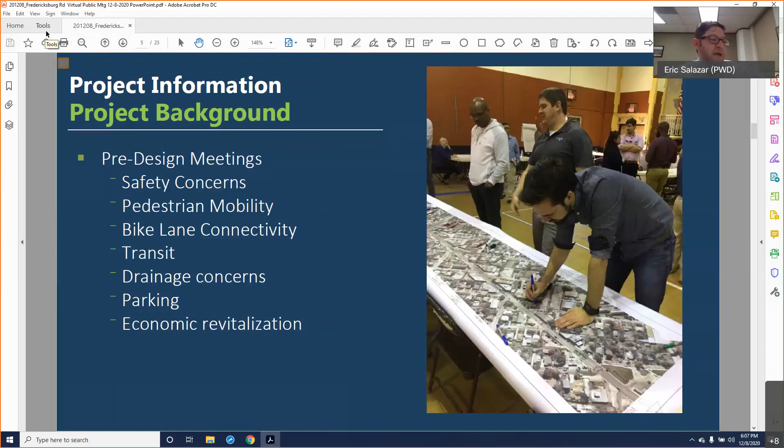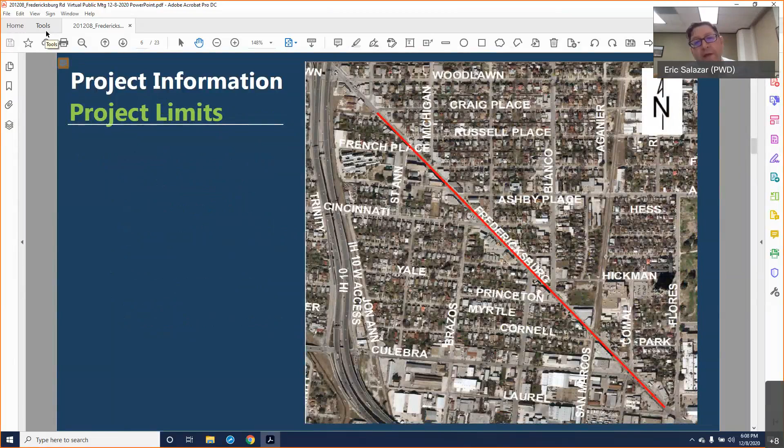The project limits stretch on Fredericksburg from North Flores to Craig Place. As you may know, the 5 Points intersection is now being constructed, so we intend to connect from that point and make our way north to Craig Place.

The existing conditions on Fredericksburg include a 4-lane facility with 11-foot travel lanes and 4-foot sidewalks. This is typically what you'll find on Fredericksburg within these limits.

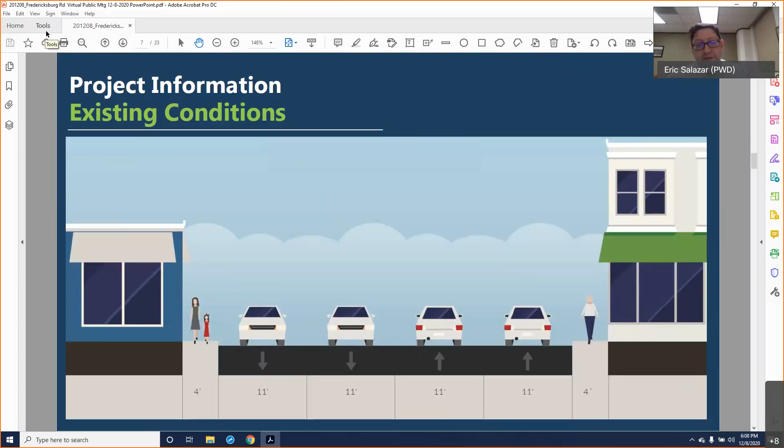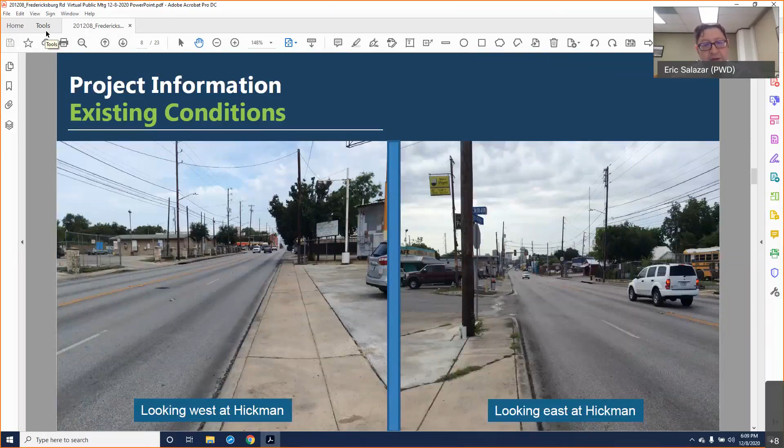These are a couple of photos of existing conditions at Hickman, one looking west and the other looking east. We have large driveways and are noticing a lot of encroachments onto the sidewalk. We want to make it safer for pedestrians, since a lot of head-in parking encroaches into those pedestrian routes.

We broke this project up into two sections. The first is south of Cincinnati, from North Flores to Cincinnati, where we have 4 lanes. Our proposed improvements include 3 lanes with a dedicated turning lane, and of course bike lanes, continuing from the 5 Points intersection and terminating at Cincinnati. The second section is from Cincinnati to Craig Place.

In that second section, we really wanted to focus on pedestrian mobility by increasing sidewalk widths, and parking was a big issue that many property owners along that corridor had requested. So we did a combination of those improvements in this particular section.

As far as the project scope stated in this bond, we are to construct corridor improvements on Fredericksburg including drainage, pedestrian amenities, and enhancements as appropriate and within available funding. So when we looked at this project, we wanted to break it up into two sections that were meaningful but also within our available funding.

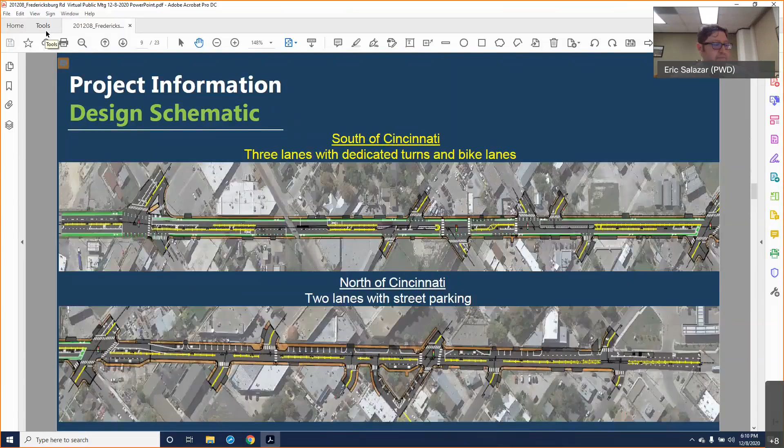These are the characteristics you would see in the section from Flores Street to Cincinnati. As you can see, we would reduce the 4-lane facility to 2-lane through traffic with a dedicated turning lane, and you'd have 5-foot bicycle lanes. We would also increase the 4-foot sidewalks to 5-foot sidewalks in this section.

From Cincinnati to Craig Place, we would have 2 travel lanes at 12-foot widths, with parallel parking in this section and larger sidewalk accommodations, transitioning from 5 to 7 feet in width.

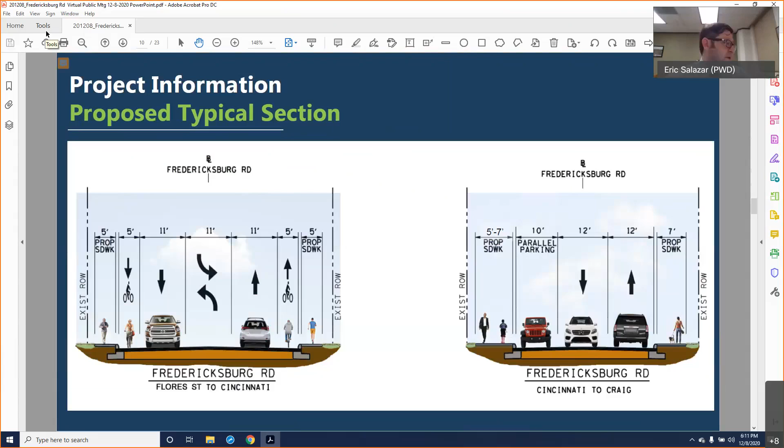Our project scope includes curbs, sidewalks, driveway approaches, traffic signal upgrades at Culebra, Blanco, Colorado, and Cincinnati, and a new signal at French. We would also add pedestrian crossings at these intersections for protection, lane reconfiguration, bike lanes, on-street parking, bus pullouts and shelters, additional drainage capture, utility upgrades for SAWS water, and surface adjustments for CPS gas and SAWS sewer.

As a prelude to the city breaking ground, you'd expect to see third-party utilities like CPS Energy moving some of their overhead poles because they're in conflict with the sidewalk, making those adjustments. Then third-party utilities such as Spectrum, AT&T, and other comms would start making their adjustments to new poles. I just wanted to note that so you're familiar with the first activities you'll see leading into us doing that work.

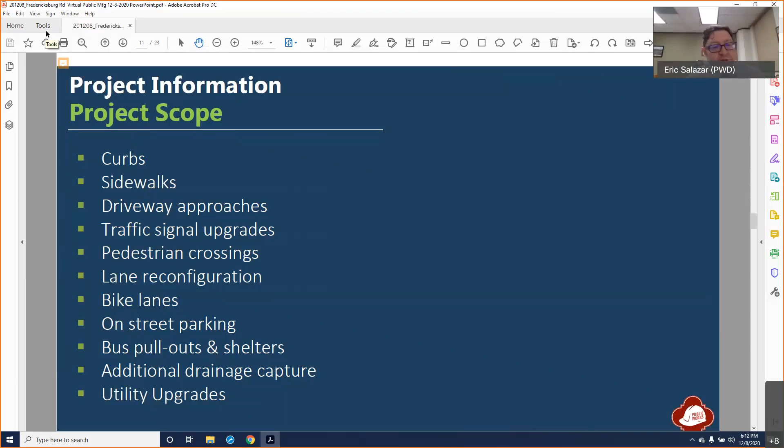Now we'll get into the schematic and proposed improvements, starting at North Flores. As mentioned, the 5 Points intersection is currently under construction, and this is where we'll tie in. We have bike amenities in that intersection, so we want to continue those amenities through the Culebra intersection. Since that's a fairly new project, we'll simply mill and overlay to have new pavement markings indicating the transition from a 4-lane facility into a 2-lane facility with a turning lane, going toward Culebra Road.

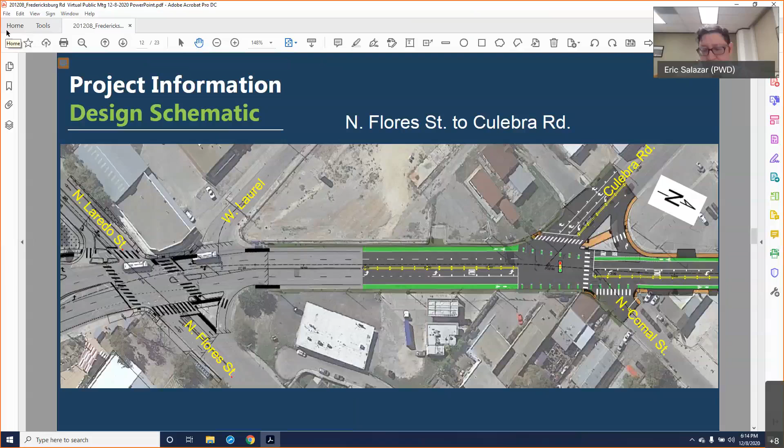Moving forward from Culebra Road to the Union Pacific Railroad, highlighted in dashed red indicates the railroad. Then we continue with the bike lanes.

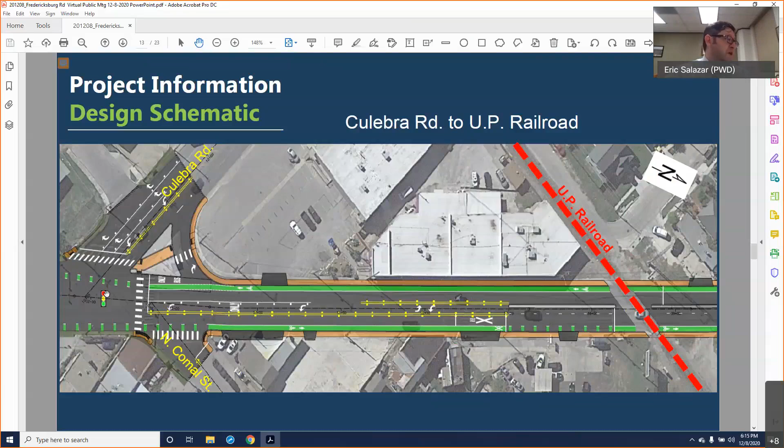When that bus sees that bar, all the lights are going to be red, and that bar will let the bus shoot through that intersection, so they can save on their transit schedule. You'll see a couple of these queue jumps at these intersections for more efficient transit mobility.

Moving on from UP Railroad to Blanco Road, we still continue with our bike lanes and the concrete medians. Here at Princeton, we have a hooded left turn lane, and then an upgraded intersection signal there at Blanco Road.

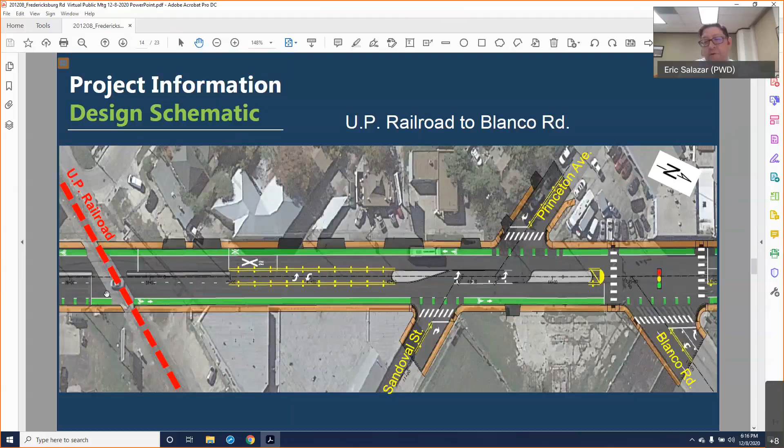From Blanco Road to Hickman, there at Colorado, we have one of the other upgraded intersection signals. We continue with the bike lanes, and we have these concrete medians between North Colorado and University.

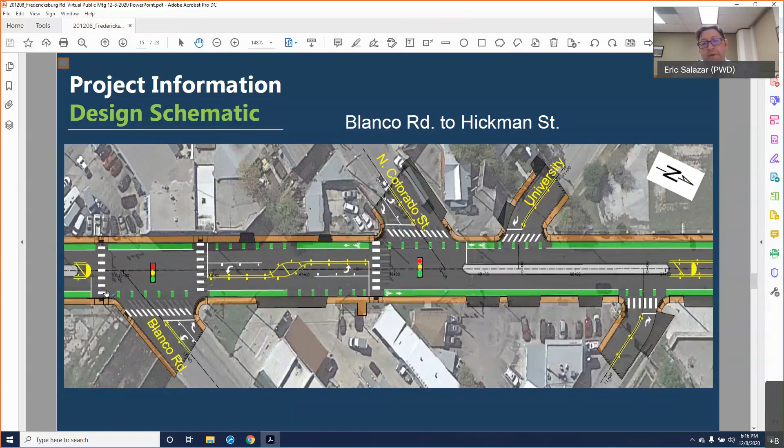Hickman Street and Cincinnati - this is where we terminate the bike lanes here at Cincinnati. There are existing bike lanes on the westbound side of Cincinnati; this is a continuation for that facility, which leads to Woodlawn Lake Park. We figured that was a real good terminus for this project, and that's one of the reasons we differentiated these segments from north of Cincinnati to south of Cincinnati.

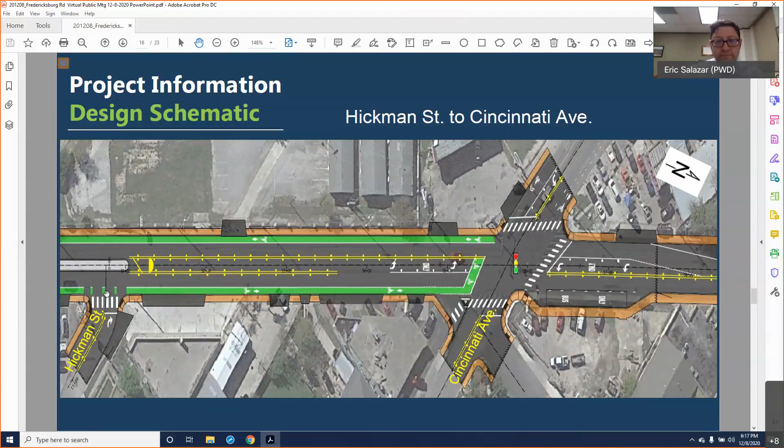Again, we continue with these raised concrete medians. From Cincinnati to Ashby, this is where we're focusing on wider sidewalks and more on-street parking.

In this section, what you'll see is a bus pullout - one of the first bus pullouts we have on this project, just on the south side of Fredericksburg Road and Cincinnati. The intention is to have the bus pull into that little bay, unload passengers, and then move back into the travel lane.

As you can see, there is parallel parking there. So that's one of the big ticket items for this particular section.

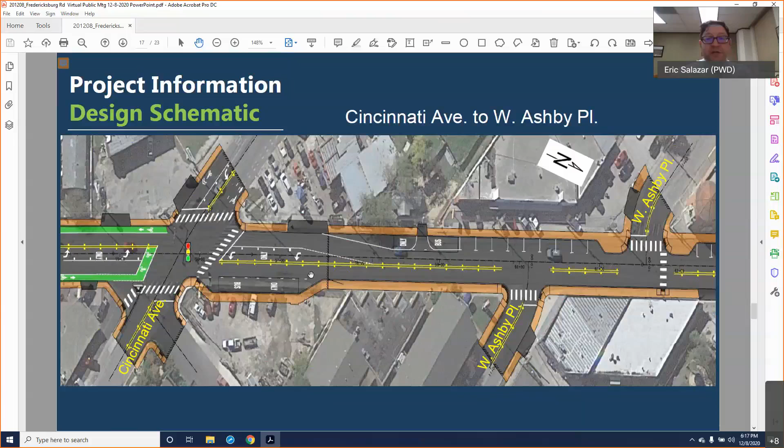From Ashby Place to North French, you can see the continuation of public parking. We also wanted to bring out there's another bus pullout there at Liz Davies green space, and I know we had some concerns in our last public meeting which we wanted to address now, so those on the call have a good understanding of what we're planning to do with that green space.

Again, we do have the upgraded intersection there at French, and this is a brand new signalized intersection.

In addition to that, this is where we have another queue jump right here at the bus pullout at Liz Davies Park or green space, and then on the southbound side of Fredericksburg at the intersection of French. Those are both queue jumps at that location.

So the next slide, I'm going to talk a little bit more about the improvements made to Liz Davies green space.

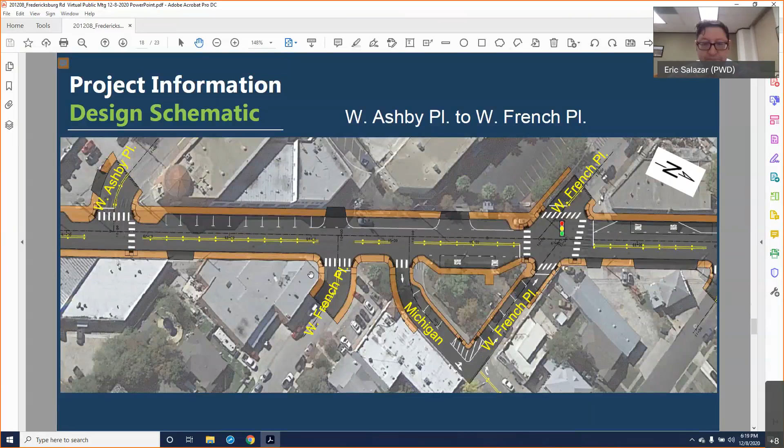However, we are making adjustments to Michigan Avenue and West French that are adjacent to this green space. We are making them one way, and in doing so, that allows us to pull more green space out of what is now curb and pavement. So when we make those adjustments for the one ways at those two streets, we're actually having a net benefit of 52 square feet of added green space.

There's also a Liz Davies plaque on the side of French Place that we won't disturb. We're anticipating that we'll make this green space a little bit more attractive, and I think it's going to be something that the Beacon Hill Neighborhood Association can be really proud of when we complete all these improvements in this area.

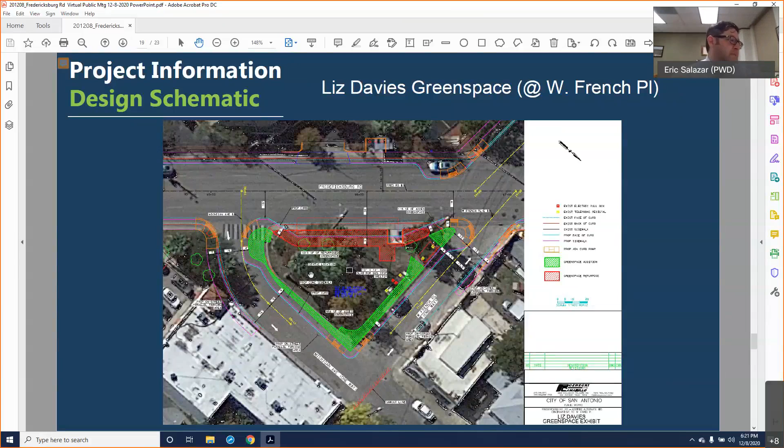We also have Miranda Garrison with Public Works. If there's any questions that pop up regarding the HDRC, she should be able to answer those.

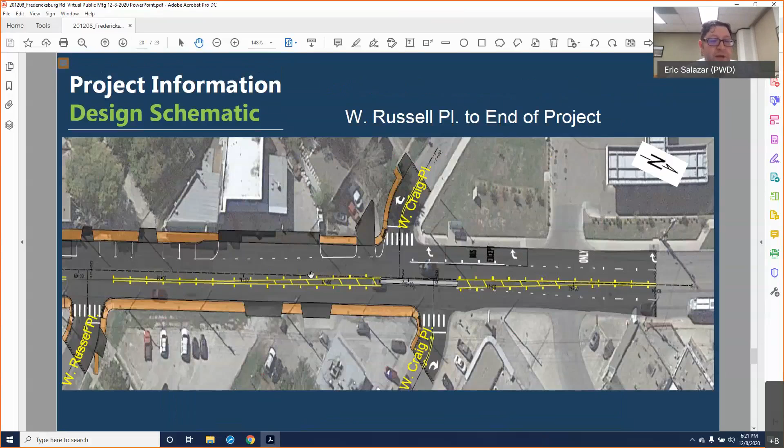Our project budget was $8 million, and our project schedule, we expect to have our design complete by next month, and then we can advertise late next month. So we estimate our construction start will be May 2021, and completion in February 2023.

Our Capital Projects Officer is Richard Cassiano. Any questions or concerns, please feel free to email him at richard.cassiano@sanantonio.gov, and his number is also posted there at 210-207-8218.

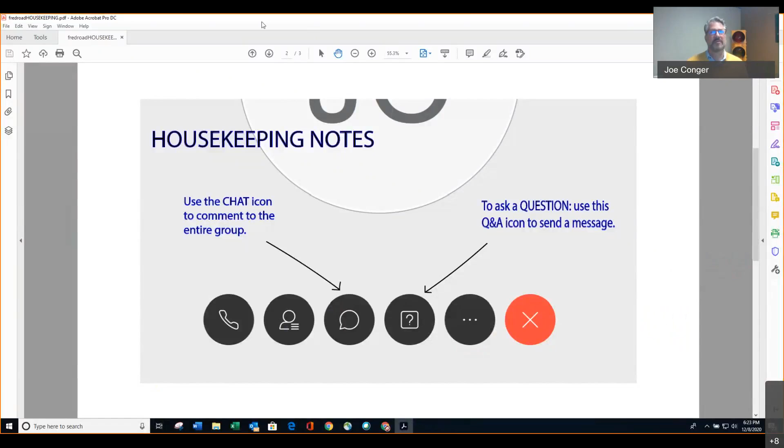I see no questions so far. Does anybody, any of our comments, any future comments or any more comments rather from our panel of experts on the presentation itself? Any additions or anything you felt like you wanted to comment on? David, you kind of raised your hand. David, what would you like to tell us?

Yeah, Joe, this is David McBeth, Assistant City Engineer, and I'm really liking the way that this project is shaping up. We've gone through a lot of public outreach early in the project, and I really feel like the corridor is set up well with the bike lanes connecting to 5 Points, connecting to Cincinnati, and then providing more spacious pedestrian elements in the northern half, which is where a lot of the small commercial elements are up in the northern portion of the project. So I think we've really reached a good balance with the design, and I'm excited to see this move forward.

Thank you for that. Not to put you on the spot, Councilman, anything you would like to add? Yeah, only to add that the goal of this project is to also acknowledge that this is setting the tone for the rest of Fredericksburg Road. And with the upcoming bond, I just want to use this as a great opportunity to talk about why it's so important to get public input, because every 5 years we get to plan another bond, and in 2022 we will have our next bond election. Our hope is that this project will set the tone for Fredericksburg Road as it continues northwest. As David McBeth said, it's great to see it coming together, to see all the public input, and I believe it's going to set a great example for the rest of this very important corridor. So we want to hear from you, and just know that this is going to dovetail into the next bond.